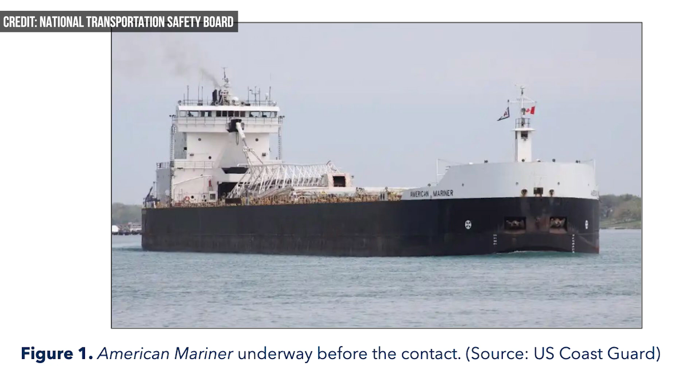The vessel took on water, but the crew stabilized it using pumps, and none of the 18 aboard were injured. Still, the American Mariner took more than $800,000 in damage, and the light suffered an estimated $1.25 million in damage.

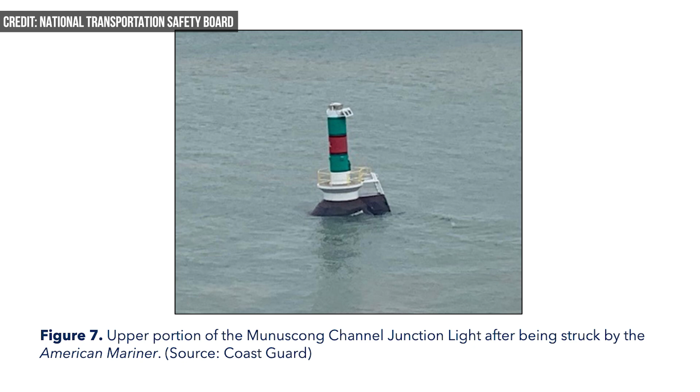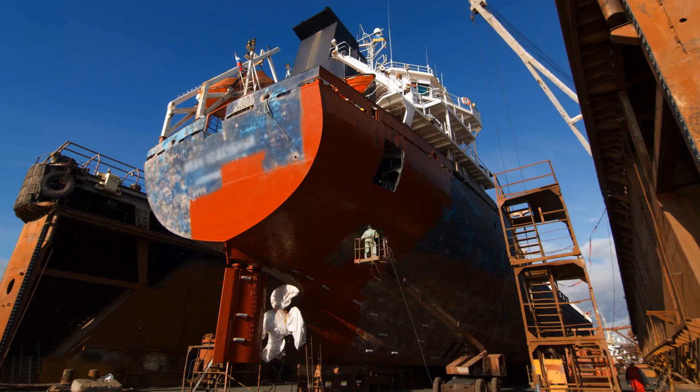The American Mariner was on its first voyage of the season, following its winter layup period, a time when the boat is pulled out of the water and stored for the winter. During this time, boats are typically winterized and annual preventative maintenance is performed. While the bulk carrier was out of the water, a new steering control system was installed.

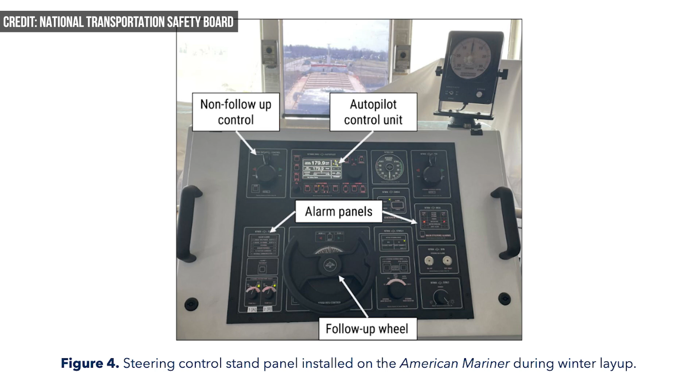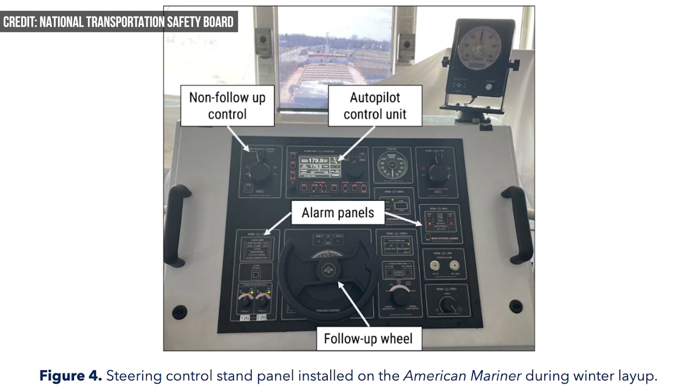The crew knew something was up just before the crash because the alarms for the vessel's steering system sounded intermittently. Unfortunately, the crew couldn't figure out why, and the rudder seemed to properly respond to commands. After the accident, crew members took a look at the new steering system and found that the number 1 control motor, which controlled the stroke of the main hydraulic pump, had failed.

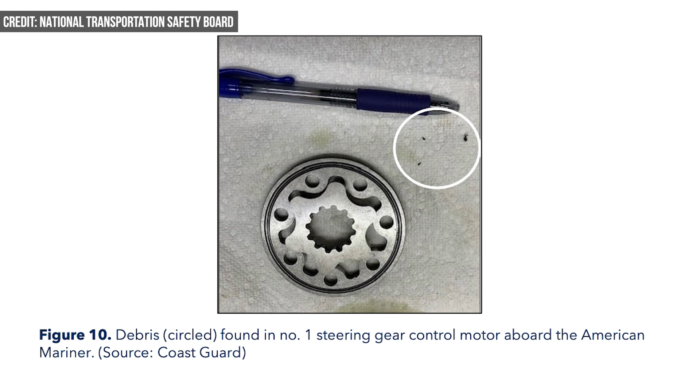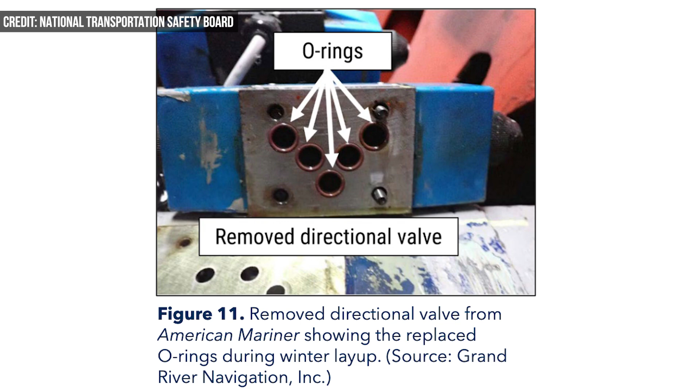When the motor was pulled apart, a small piece of black, pliable debris was found lodged in between the rotating gears of the control motor, which stopped it from rotating properly. Once a replacement control motor was installed, the steering system responded properly to steering commands from the bridge.

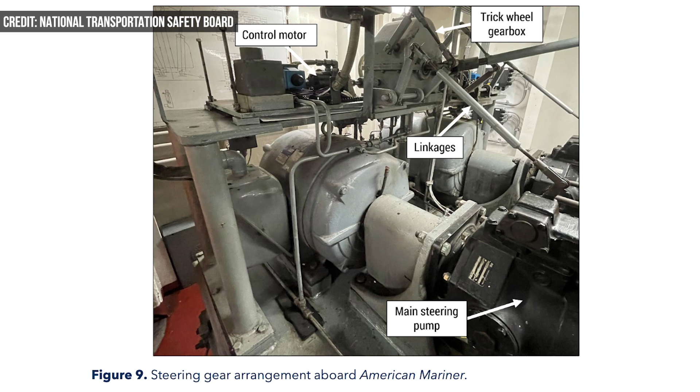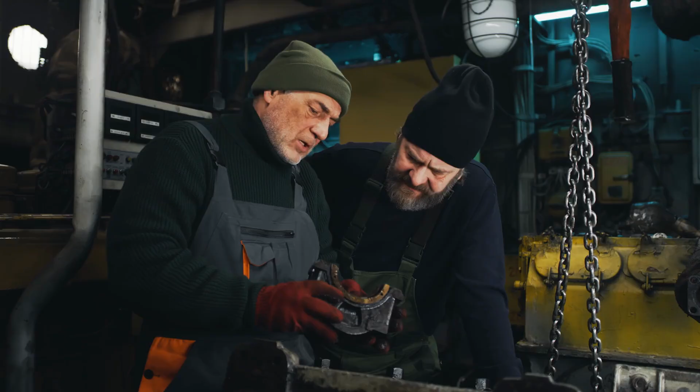The technicians used a hammer to separate the gear assembly, and a, quote, non-metallic black piece of material was found lodged in between the inner and outer gear machining and gear housing. The chief engineer said the debris looked like, quote, either gasket material or a sliver of an O-ring. It was about the size of a quarter of a pencil eraser, he said. The 3 pieces of debris that were found measured a mere 2 to 4 millimeters in length.

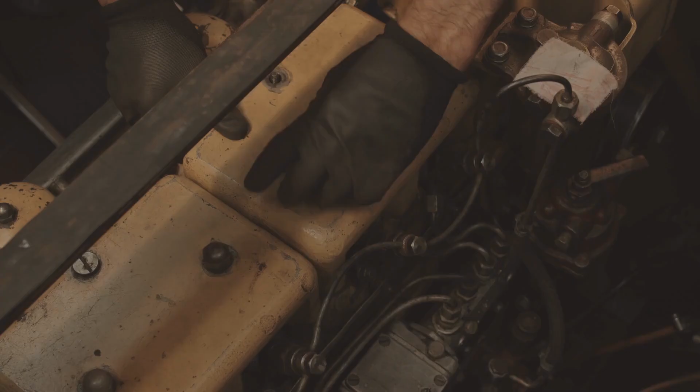According to the NTSB, the probable cause of the accident and more than $2 million in damage was O-ring type material debris in the steering gear system's hydraulic oil, which became lodged within a control motor, causing it to seize, which made the rudder lock at its last ordered position.